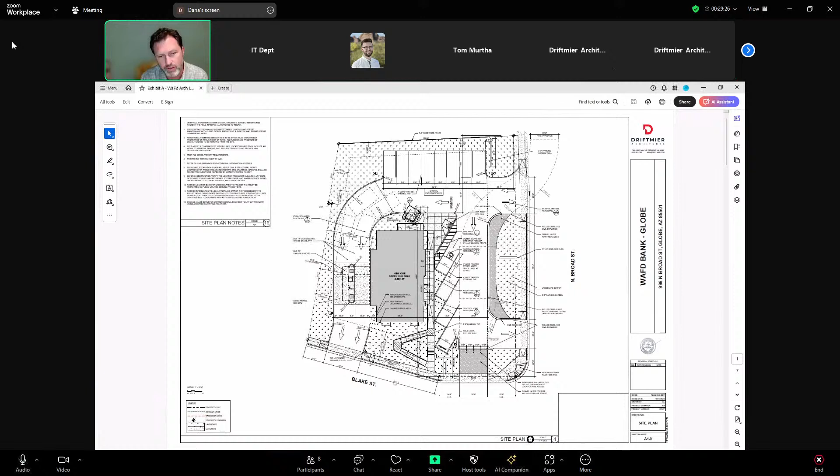As you know, the existing property does not provide the landscape setback that our current code requires. This proposal does, both on Blake and along the Broad frontage.

It's about a 2,300 square foot bank facility with 2 drive-through locations that exit strictly out to Blake Street, and then the only other exit is a one-way drive aisle for the parking spaces along the frontage of the building, which is exit only.

ADOT had reviewed this originally when we were working with this applicant for probably 6 or 8 months, and ADOT has reviewed and will ultimately require the applicant to submit for permit for those curb cuts when they're ready to construct.

They have a proposed pylon sign at this location. There is an existing sign on site. I don't know if the applicant has determined whether the existing sign will remain or if they'll propose a new pylon sign, but that's not part of this application. It would be administrative, given it doesn't need any special approvals when the site permit comes through.

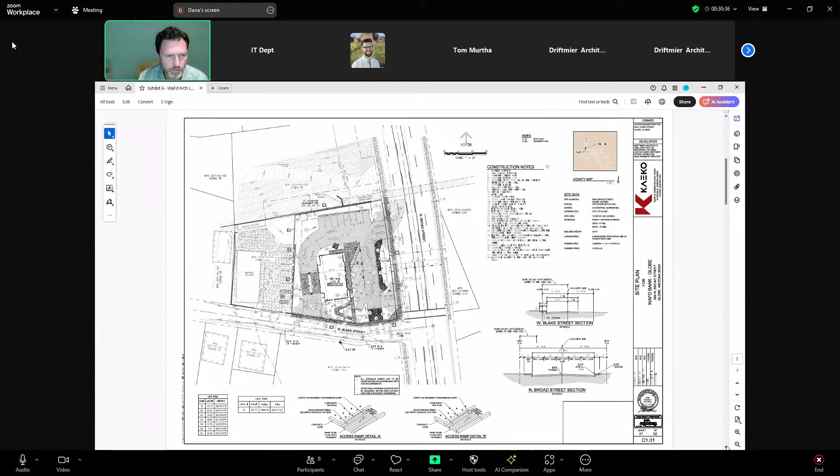There's a paving plan, landscape plan. You can see trees along the frontage in a larger landscape area in the northwest, adjacent to the residence.

Floor plan for the bank, drive-through, you see on the top here.

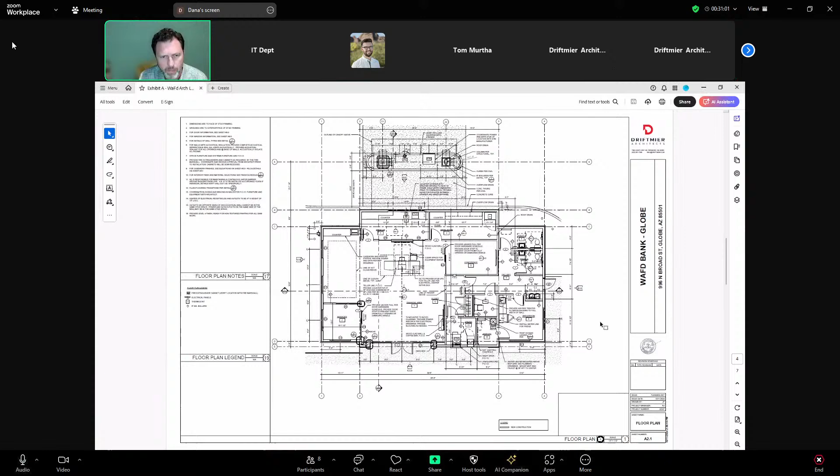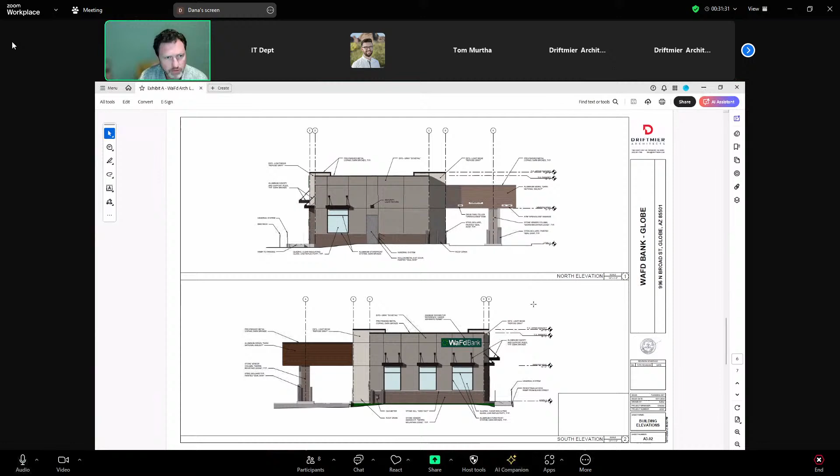So the parking area and the trash enclosure, which happens to be located just beyond that exit. And again, the final images.

So with that, staff recommends approval of this request. We have 7 conditions of approval that I'll quickly touch on.

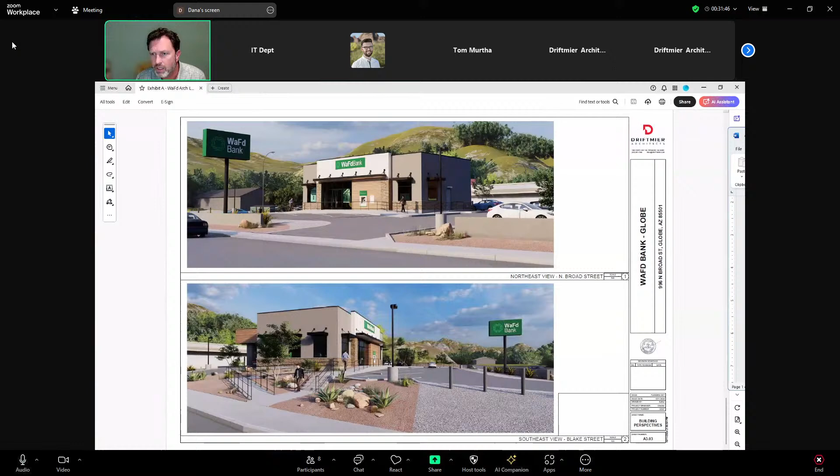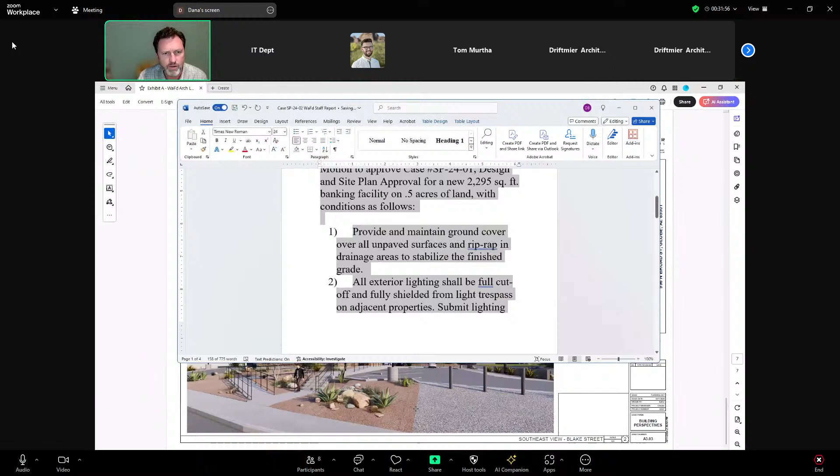First, provide and maintain ground cover over all unpaved surfaces. That's typical, and riprap in drainage areas to stabilize the finished grade. Given the additional slopes we have now, we want to make sure it's not going to end up in our rights of way and cause other issues, which the landscape plan shows.

All exterior lighting shall be full cutoff and fully shielded, so we still need to see those light fixture details, but as long as they're full cutoff we are fine. We'll probably have a few lights in the parking area and at the entrance.

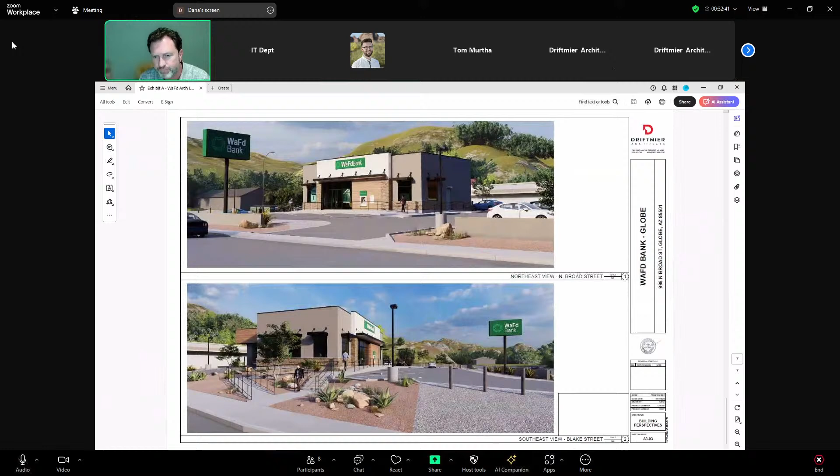Meet our lighting code: maximum 3-foot fence height within the 20-foot front setback, which we just want to reiterate. There are screen walls shown on the site plan, as our zoning code requires. Here's a screen wall located adjacent to these parking spaces, and screen walls on either side of a future sign location, plus a small screen wall at this location.

So again, I just want to reiterate for the record, in the condition of approval, that the reduction of that 10-foot setback is per the plan for the parking areas.

Item number 5, the sign location be a minimum of 5 feet behind the front street side property line to maintain clear sight distance for exiting vehicles. We want to make sure that won't obstruct sight visibility, which it doesn't appear to based on where it's located, but we'll ensure that through the building permit review process.

And then finally, revise the southwest angle parking space so it doesn't encroach. They can just move back the curb and not have a parking space blocked—you see it darkened here—and they could overhang that by 2 feet, so we don't see an issue there.

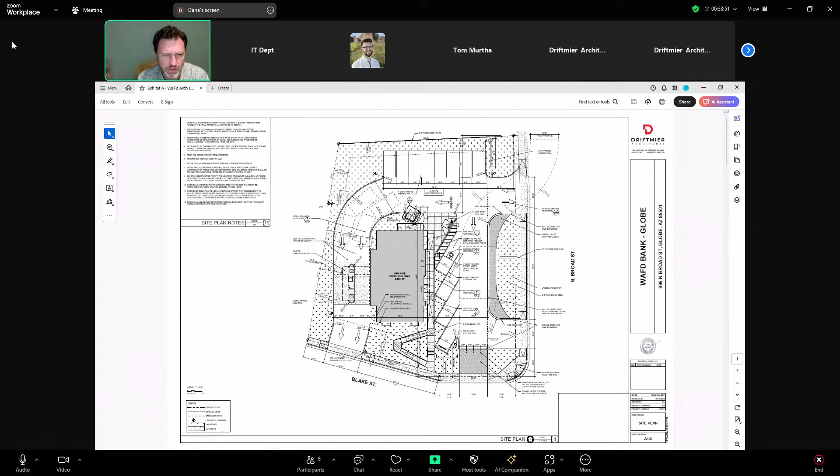The architect may have a better solution, but that's the only item, and then finally, apply for ADOT access approvals. Those are the recommended conditions of approval.

Staff is very excited for this development. I'm happy to see the redevelopment of this site on this corner, and we are recommending approval. Happy to respond to any questions you have.

Go ahead, Dana, I have a question about waiting for ADOT access approval. Is there any chance ADOT would say no, you can't have a bank at this place because it's going to impact traffic on the highway? I guess I'm trying to understand what that process would look like. Thank you very much.

Chairwoman and Vice Chair, so it's a right-of-way permit or encroachment permit. Currently we have these two large curb cuts for this proposed bank, and then obviously all its commercial spaces. The existing demand would most likely, if this development was fully utilized, have a higher traffic demand. So one thing they're going to ask for is to show traffic impact. They're required to provide access to the parcel, but they have a review process.

Given that they're going exit only here, two-way exit up here, entry, ingress, egress, and then exit to Blake Street. That's a new exit to the property that wouldn't otherwise exit to the right-of-way. So I think there's a net reduction in the amount of potential access to the right-of-way.

So all that taken into account, my familiarity with working with ADOT and other projects, this would be a much safer design, and I'm sure that will support it. Now, if it were a coffee shop and there were stacking issues, ADOT would take a deeper dive. They're very particular about coffee shops, but in this situation, the stacking distance could go all the way—exceptional, two lanes nonetheless.

So I definitely don't think ADOT would have an issue with it. And as I mentioned, they have reviewed this. They did not provide comment or express that they didn't have any significant comments, but provided approval for the application, and that's the process. So if there was an issue and a change to the site plan, I'd have to come back to you.

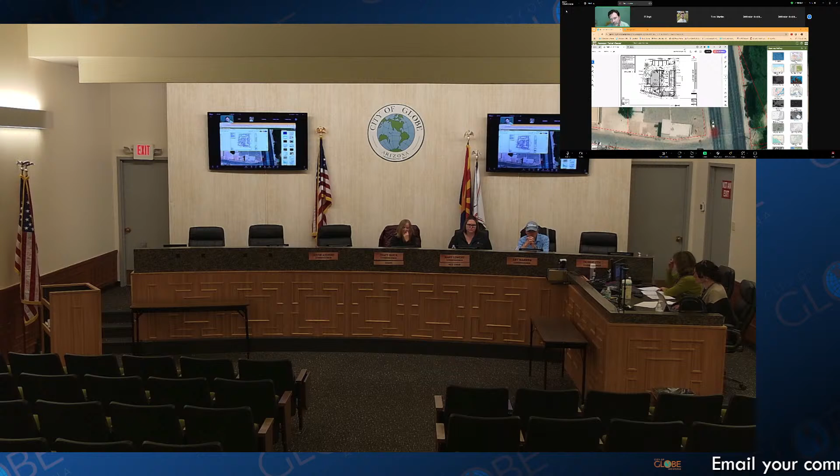Is there any consideration of a traffic light at Blake Street? So being a highway, that could come up in their review and processing with ADOT, and that could be an ADOT requirement. They didn't mention that, and that's a significant issue that I believe they would have already flagged and provided some insight to in the prior reviews.

And definitely there's something also for the future—a crosswalk over here, we know, but again, it's ADOT right-of-way. We don't have control over that, no review of the plans.

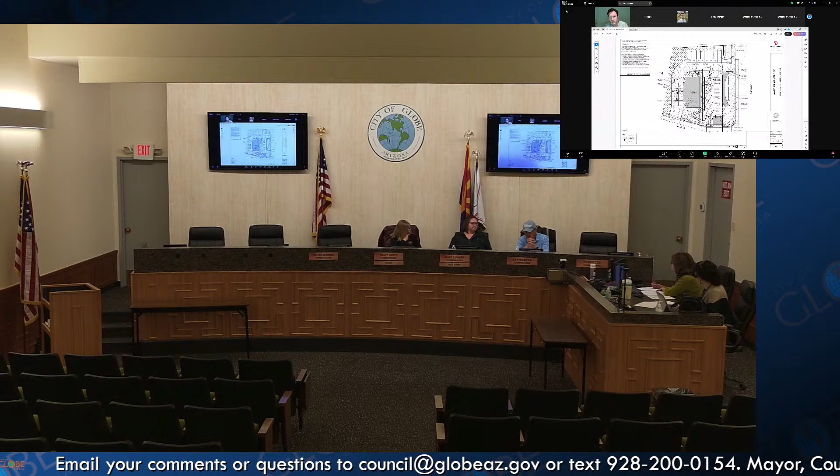Art, do you have any questions, concerns? No, I don't have any concerns at this point. Traffic is probably the biggest concern I have.

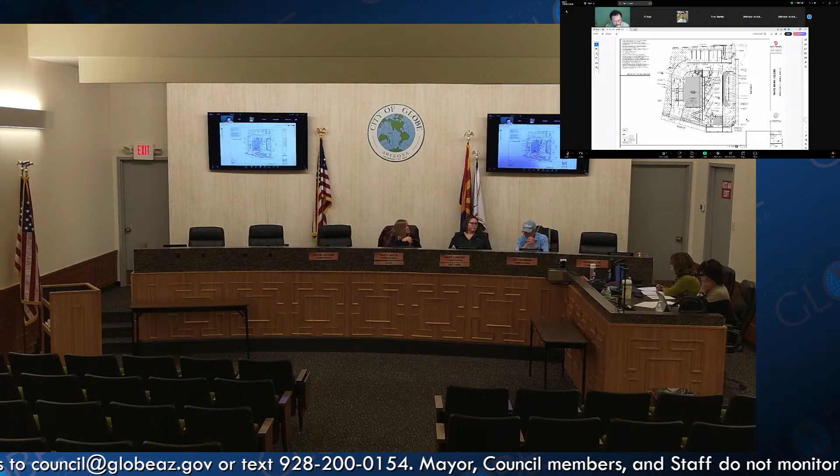It's just going to be on or in or out. You face a lot of the traffic there. I've noticed it goes in bursts—you get a long line and then you get some lulls. So patience is the virtue there, but at some point progress requires traffic and bad parking, yes.

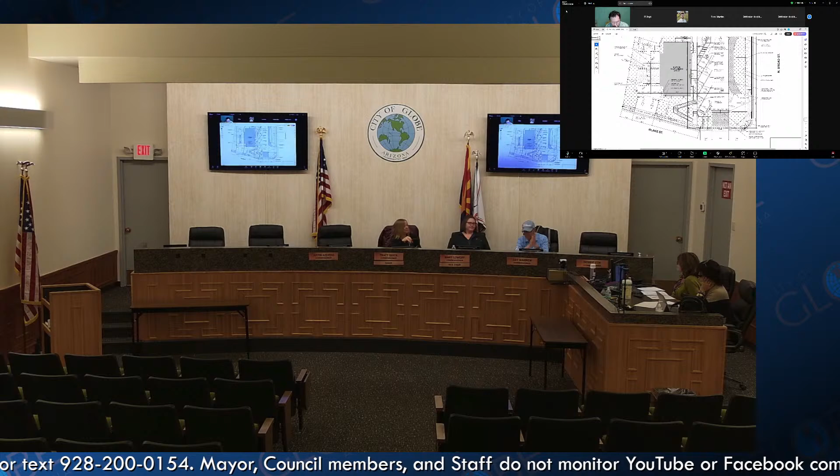This one, I mean, Dana's right though—there's a lot of room, yeah, for back up here. It's not like you're gonna have to worry; think about the length of an average car here, and you've got two lanes, so I'm not worried about that. I mean, if ADOT approved that coffee shop right off the street, I don't see why this would have any problems.

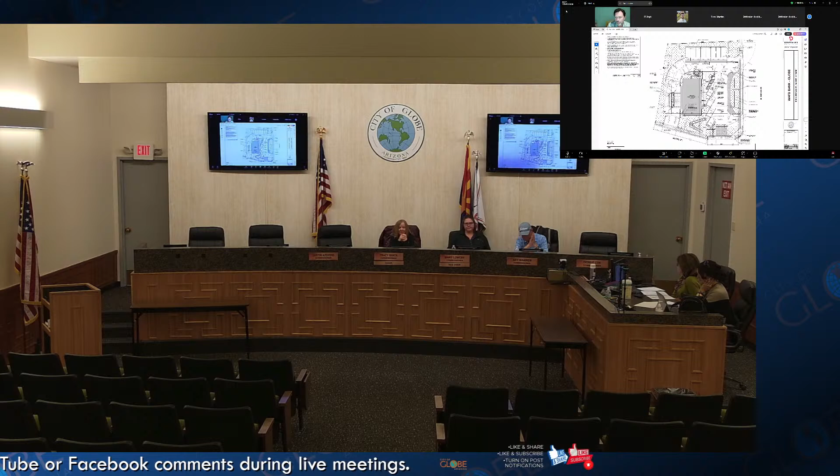I agree totally. So I wondered what that process looked like. Right, so nope, I don't have any other comments. Justin? Not many other questions here.

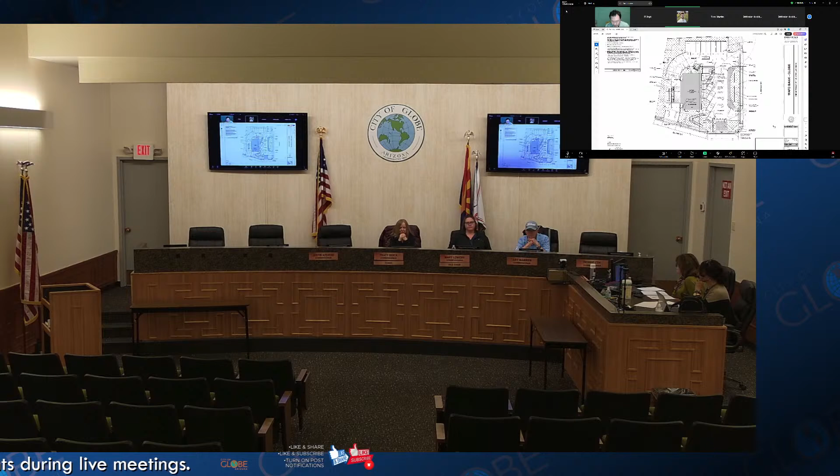Project looks great. I think the only big curiosity I have is the old bank moving to this new location—are we gonna have two locations? But that has nothing to do with the approved plan, just curiosity. I assume they're moving, right? So we're not gonna have two Wells Fargos. Correct. I wonder what'll happen to the other one—it'll be a relocation. That's exciting. Then there's another building available. That'll be another meeting.

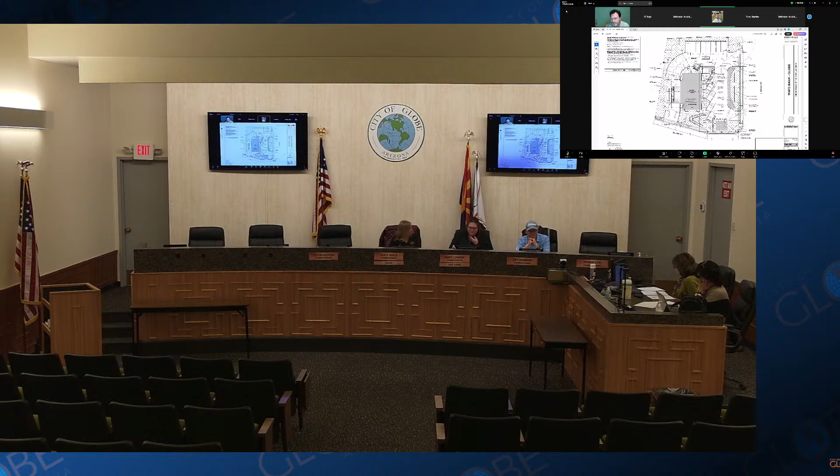Very good. If no one has any other questions or concerns, why don't we get a motion? Motion to approve case number SP-24-01, design and site plan approval for a new 2,295 square foot banking facility on half-acre land with conditions as outlined in the proposal, with those seven conditions. Do I have a second?

I'll second that motion. Very good. We got a motion and a second. All those in favor say aye. Aye, aye, aye. Anyone opposed? Nay? Motion approved.

That was a quickie. Do we have any future agenda items or scheduling of meetings that we need to discuss? Chairwoman, not at this time, nothing—it's just been low for proposals.

We have, staff is discussing the opportunity to take advantage of the opportunity to possibly look at some text amendments, much needed text amendments that we've discussed in the past, of fence and front yard fence heights and things like that, so hopefully we'll bring something like that ahead and start cleaning up the code a little bit.

That'd be good. Very good. That's all I have. That's it. Okay, Shelley, you have anything to add? No? Linda? No. No, thank you very much.